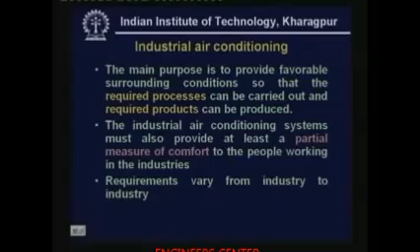Depending on what kind of products you are producing, or what kind of processes are being carried out, the required conditions will be varying.

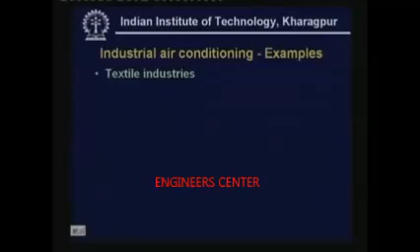Some of the examples are textile industries. Textile is one of the oldest users of air conditioning. The yarn used in a textile is very sensitive to temperature and humidity. So, if you want to have a very high output, you have to maintain the humidity and temperature within certain limits, so that the yarn can move at high speeds without breaking. This is the reason why it was used in the early days, and how the output was increased using an air conditioning system.

And air conditioning is also required in printing presses. In printing presses, typically, for example, if you look at a color printing press, the ink will be deposited in stages. When the paper moves from one stage to the other stage, the ink has to dry off before it reaches the other stage. For example, let us say that in the first stage you are depositing red ink, and the next stage is black ink. By the time the paper moves from the red ink stage to the black ink stage, the ink has to dry. If it does not dry, then there will be problems, and there will be mixing of the colors. So, you have to again maintain certain humidity, so that drying can take place within the required time.

So, all printing presses require very good air conditioning systems, and also the paper used is sensitive to the humidity. So, you have to maintain humidity at certain levels, so that you can prevent the curling of the paper, etc.

And as I mentioned already, air conditioning is also required in manufacturing of several precision parts. This is particularly so in case of wrist watches, or semiconductor elements, where the cleanliness, temperature and humidity are very, very important. For example, if the humidity is not right, and people start sweating, and they handle the parts with sweating hands, then water gets deposited on the parts, which may lead to rusting. Since here the dimensional accuracy is very, very important, you have to prevent any variation in the dimensional accuracy. That means you have to maintain both temperature as well as humidity.

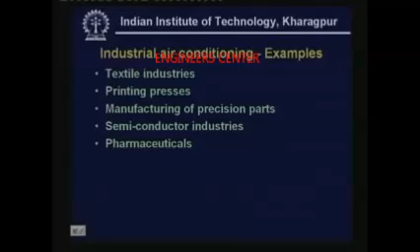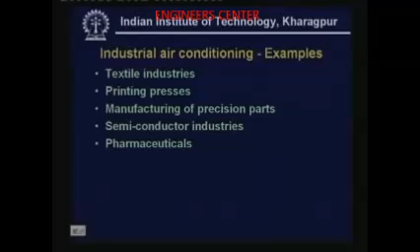And in pharmaceuticals, several pharmaceuticals involve chemical reactions, and they require controlled conditions of temperature and humidity. So, when they are being produced and when they are being stored, you require certain temperatures and humidity. In fact, you might have seen on many of the medicine bottles, they write store in a cool and dry place. That means the medicine is sensitive to temperature. You have to store it in a cool place, and it is also sensitive to moisture. That is why they say cool and dry.

Then photographic materials. Photographic materials are also very sensitive to moisture and to some extent to temperature also. So, again they require air conditioning. In fact, if you remember, Eastman Kodak is the first company to use air conditioning for storing its photographic products, way back in the 1900s.

And air conditioning is very much required in computer rooms, especially in large computer centers. There is a large amount of heat rejection, which has got to be taken out. So, you require an air conditioning system. Also, in large computer centers, there will be a lot of heat generation because of people, which also needs to be taken out. So, all computer centers require good air conditioning systems. Also, computer centers require clean air, because you should not have any dust particles floating around. So, typically you have to maintain not only the temperature and humidity, but also the cleanliness of air.

Then air conditioning is also required in mines. For example, in mines, as you go down, the temperature will increase, so it will be terribly hot underground inside the mines, and the workers have to do hard work inside the mines. That means they will be rejecting a lot of heat, the outside temperature is very high, and a lot of heat generation is there. If air conditioning is not provided, then the miner will be subjected to what is known as heat stress, and he cannot work properly. So all mines require good air conditioning.

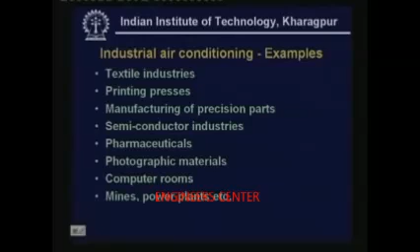And air conditioning is also required in large power plants. In large power plants, inside conditions will be typically hot because of the presence of boilers and other equipment, etc. So the workers will be generally under some heat stress. So you have to provide some amount of comfort by way of air conditioning. This is also true in case of, say, steel industries. In steel industries also, inside conditions will be very harsh. So you have to have some kind of an air conditioning system.

One problem with large power plants or steel mills, etc., is it is not possible to air condition the entire power plant, or you cannot air condition an entire steel mill. That's not commercially feasible. So what is generally done is they resort to what is known as spot cooling. That means certain areas where the workers are, only those areas are cooled and the rest of the areas are not cooled. So this is what is known as spot cooling. So by using spot cooling, you can provide some measure of comfort to the workers.

Now let us look at one very important aspect of air conditioning, what is known as indoor air quality. We will see in later lectures that the energy consumption of an air conditioning system depends upon how much fresh air or how much ventilation you are providing. So in the olden days, to reduce the energy consumption, people used to reduce the amount of fresh air. That means they used to recirculate the same air again and again so as to reduce the energy consumption.

But later it was observed that people who were spending a lot of time in air conditioned buildings were suffering from several problems, and this is known as the sick building syndrome. That means people working in air conditioned buildings experience certain sicknesses, and this is known as sick building syndrome. And later they found that not only temperature and humidity and air motion, but also the quality of air that you are supplying to a conditioned space is very, very important.

This is even more so nowadays because people are spending a large part of their lives inside buildings. It is estimated that about 80% of the time is spent in conditioned space. So if the conditioned space is not clean and the air quality is not good, then people will fall sick. As a result, indoor air quality, or IAQ, has emerged as a separate branch of air conditioning, and it requires different techniques to ensure air quality. So this is one pertinent and important issue of indoor air quality.

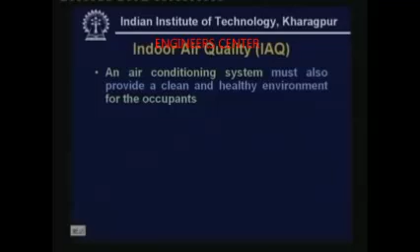And as I said, any air conditioning system must provide not only required temperatures, but also clean and healthy environments. In the olden days, people were very sure that an air conditioned space provides comfort, but they were not really sure whether it is good for health or not. And subsequent studies have shown that if you don't design an air conditioning system properly, in fact it can be very unhealthy. So nowadays the emphasis is not only on comfort but also on healthy environment. So this is the area which is dealt with by IAQ, or indoor air quality.

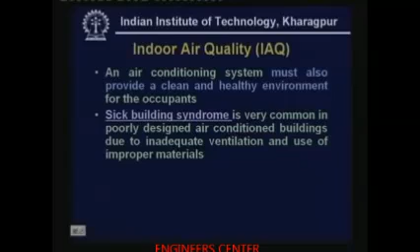As I mentioned, the sick building syndrome is very common especially in places where the outside air is dirty and the designer of the air conditioning system provides very little ventilation to save energy. So typically the indoor air quality depends on the amount of ventilation that is provided, the quality of outside air or the fresh air that you are supplying, and also what kind of materials you are using inside the conditioned space. So these three parameters decide whether an environment is healthy or not.

And generally any indoor air quality study recommends the required ventilation quantities, and also recommends what kind of materials should be used within the conditioned space, and how to treat the air. The fresh outside air itself may be dirty, then you have to treat the air before you supply it to the conditioned space. So all these aspects come under the indoor air quality.

Now let us look at another very important issue, that is energy. All air conditioning systems consume a large amount of energy, and now because of the requirements in all industries and in many office places, residences, etc., the installed air conditioning capacity is increasing tremendously, and all these systems require energy, so the energy consumption by air conditioning systems is also increasing tremendously. And in the olden days, people did not care much for the energy consumption of air conditioning systems. So they were designing the systems without optimizing them. As a result, they were consuming a lot of energy.

So nowadays the focus has shifted. Now people say that they want a system which provides not only comfort but which is also energy efficient. So this is the second issue of any air conditioning system. So energy efficiency has to be guaranteed by the supplier and by the designer. And the energy efficiency of any air conditioning system depends not only on the air conditioning system but also on other factors.

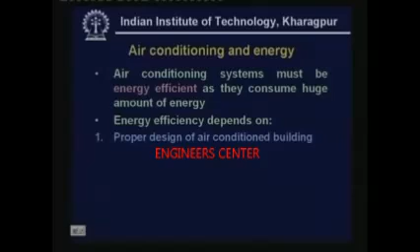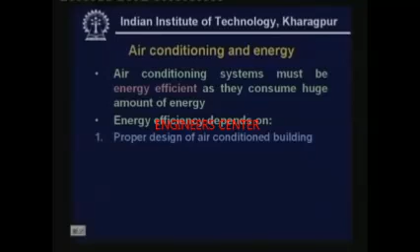So here the architect has a role to play. The architect along with the air conditioning engineer has to do the complete system design so that the total energy consumption is reduced. And people also use names like intelligent buildings, etc., with reference to the energy consumption.

The second important aspect is selection of suitable refrigeration systems. All refrigeration systems are not equally good for all applications. Depending upon your requirement, you have to select a suitable refrigeration system. For example, in areas where a lot of waste heat is available, it makes sense to select a vapor absorption system which uses the waste heat and not electrical or mechanical energy. So depending upon the situation, you have to select the required refrigeration system.

The third factor is the selection of suitable indoor conditions. As I have shown, the optimum indoor temperature varies anywhere between 20 to 26 or 27 degrees centigrade. You will see later that if you are trying to maintain lower temperature inside the conditioned space, that will lead to higher energy consumption. A lower conditioned space temperature means in general higher energy consumption. So if it is not absolutely required, we must try to keep the temperature on the higher side to reduce the energy consumption. And several factors again come into picture here.

For example, you are designing an air conditioning system for summer for a typical office building, and everybody in the office is wearing very heavy clothing like suits. Then you have to maintain lower conditioned space temperature so that they can reject the heat. That means lower temperature in the conditioned space and higher energy consumption. If the same person is wearing light clothing, then you can have a higher temperature in the conditioned space, and thereby reduce the energy consumption. So the selection of suitable temperature is also very important.

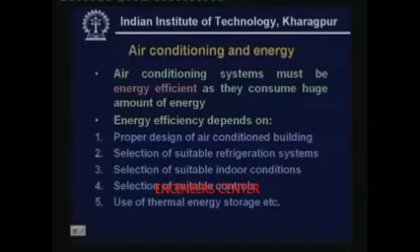In fact, this is also the reason why old buildings like old temples, forts, etc., are comfortable even in summer, because the walls are so thick that they store a lot of thermal energy and thereby provide comfort even without any artificial air conditioning system. So thermal energy storage can be provided by way of the walls itself, or by other means. These are the ways by which you can control the energy consumption and improve the energy efficiency of an air conditioning system.

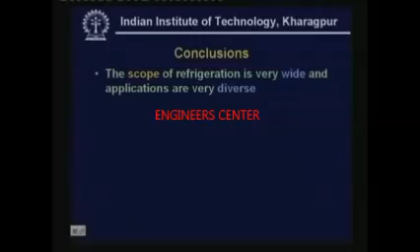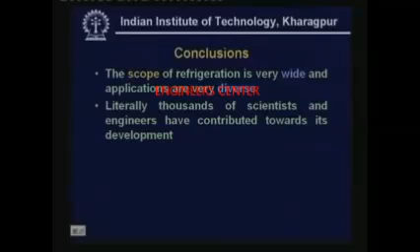Now let us conclude this lesson. We have seen that the scope of refrigeration and air conditioning is really very wide and the applications are very diverse. It has grown tremendously thanks to the efforts of thousands of scientists and engineers over a period of say 100 to 150 years. So it's not the result of a single man's effort, but the effort of many people.

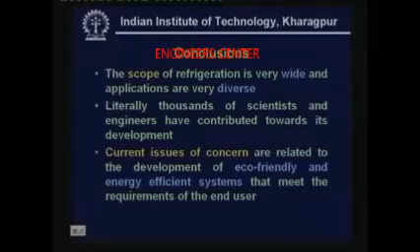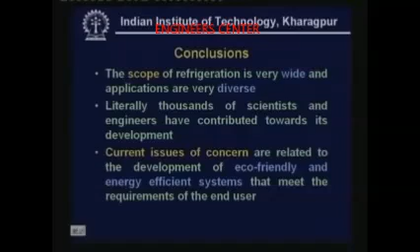Right now, as I mentioned, the issues of concern are first energy efficiency, and second eco-friendliness. That means the refrigeration systems that you are using should be eco-friendly. They should not create any damage in the environment. These are the important concerns, and people are working to develop systems which are both eco-friendly as well as energy efficient.

Based on this lesson I have given some questions. The answers to these will be provided in subsequent lessons.